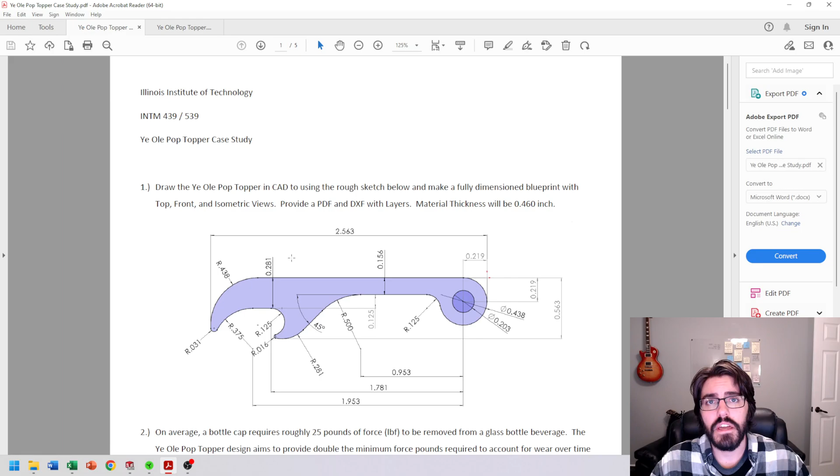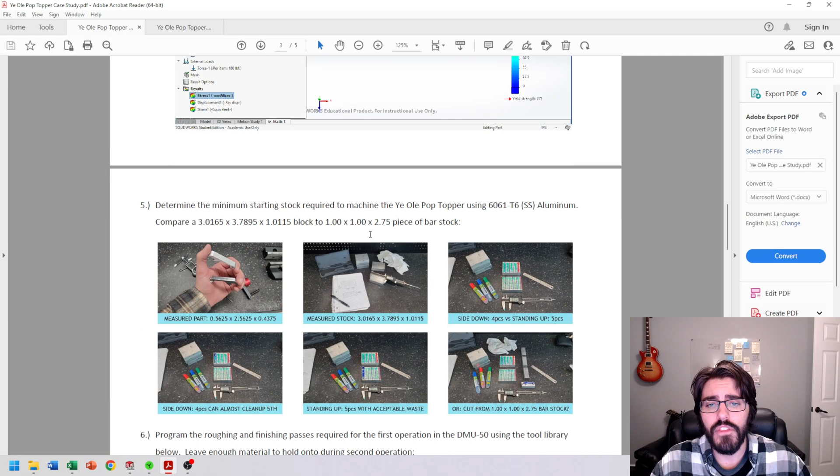And we'll create a couple configurations and apply different materials, and we'll compare and contrast those materials by using a finite element analysis, or in SolidWorks it's called SolidWorks Simulation. Then we'll make a work holding assembly for the second operation so it can be machined, and then we'll wrap up the case study by actually machining the part in class.

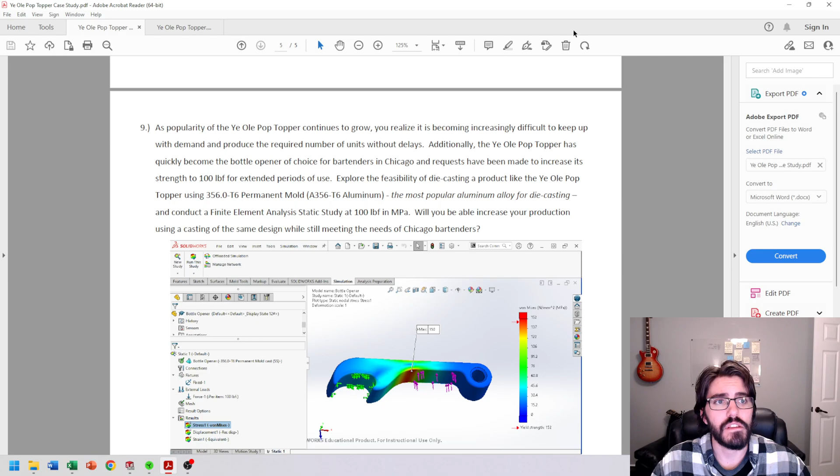So that being said, you'll be able to download a handful of files from the Google Drive and just put them in a folder somewhere. I have one on my computer already, but we'll see a file for a PDF, which is going to be the blueprint. You can open this on any device.

And then we also have a file for the DXF, which if you have SolidWorks downloaded on your computer, you should have eDrawings downloaded as well. You can also get this app on your phone, and you can send files to and from customers or clients or your boss, and they can review drawings on the go as well. But this is an eDrawings file. If you look here at the type, it's a DXF file.

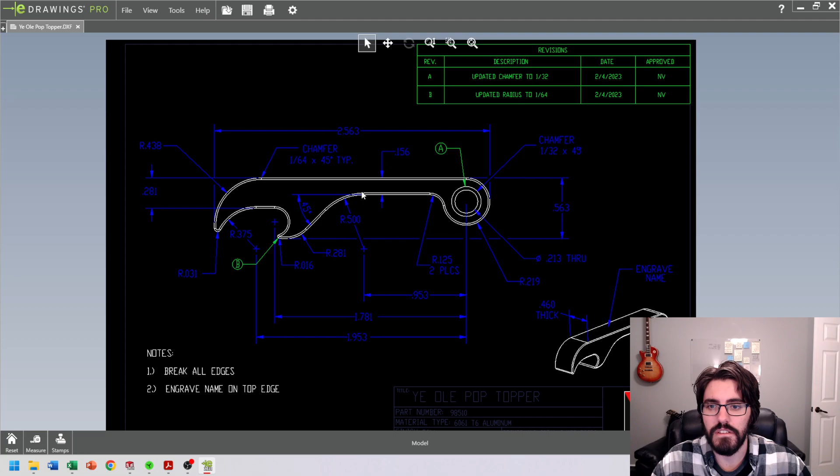If I double click on this, it's going to open up a different application. And what's convenient about this application, different from the PDF, is I can actually take some measurements of the geometry that I see in front of me. Now, I know I have this all dimensioned as a blueprint, but if I didn't have a dimension on something and I wanted to see what that was, I could click down here in the bottom left-hand corner. It says measure, and I have the little measuring tape. I can click on one edge or a point to another edge or a point, and it'll tell me what that distance is.

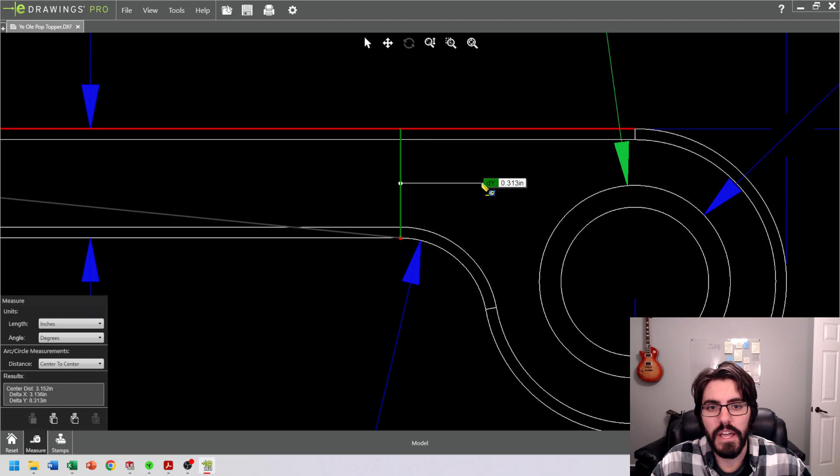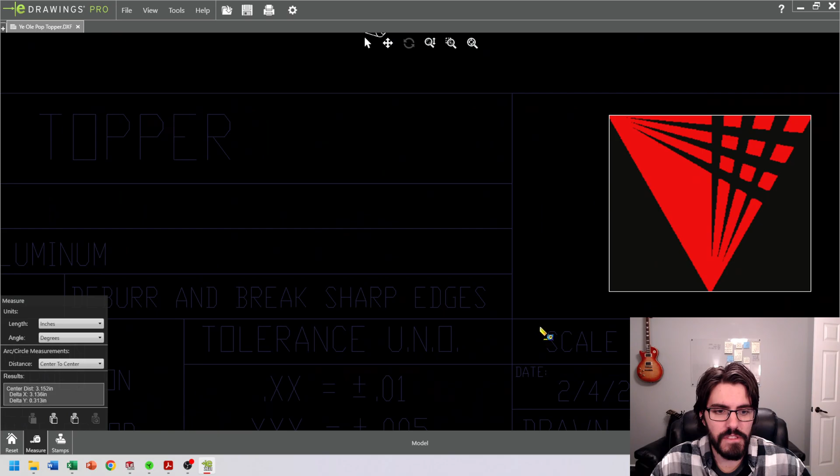Now, herein lies a little bit of a conundrum. We have a 156 dimension listed on the print, and we have 313 listed here on the measurement. Now, which one of those is correct? Well, we'll have to refer to the title block to determine that. And if we see down here in the bottom right-hand corner, we should have a 2:1 reference for the scale, which means that the geometry that we're seeing on the blueprint is twice as big as it should be. Now, that isn't a bad thing.

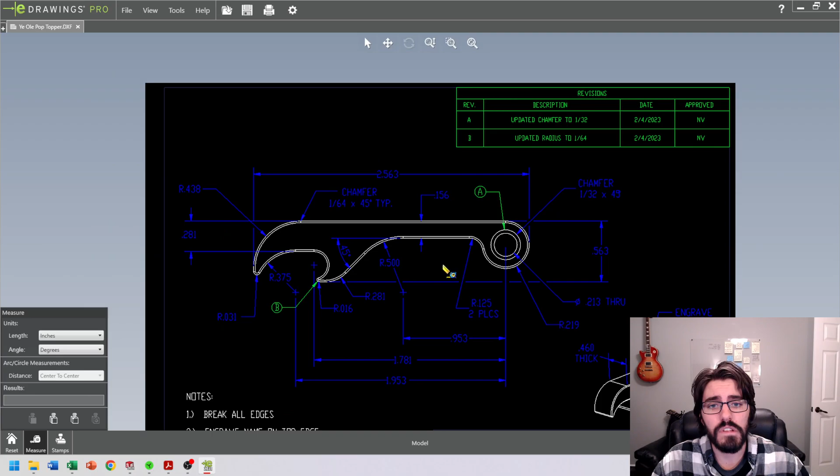It's actually probably helpful for whoever's making the drawing because the part is 2.5 inches. And if this was a 1:1 scale, we probably wouldn't be able to fit all of these different dimensions on here. So we've taken advantage of the fact that we can increase the scale and put all of the dimensions in one view instead of having to split it up between a top view or front view and then a detail view and trying to reference all these different areas of the print.

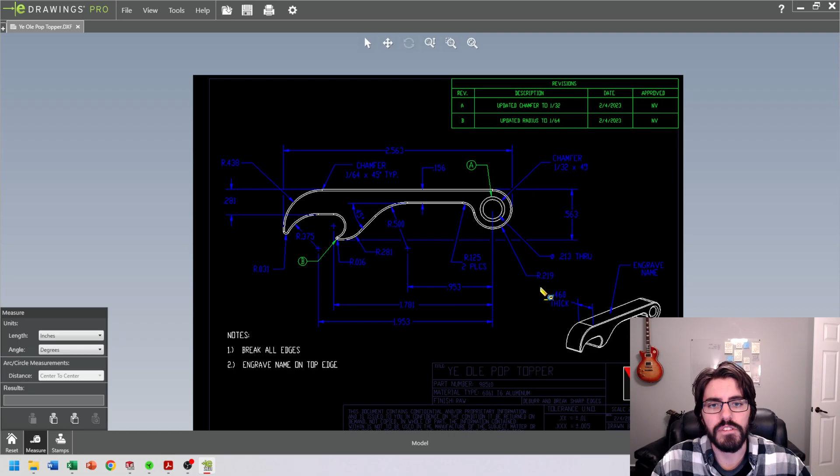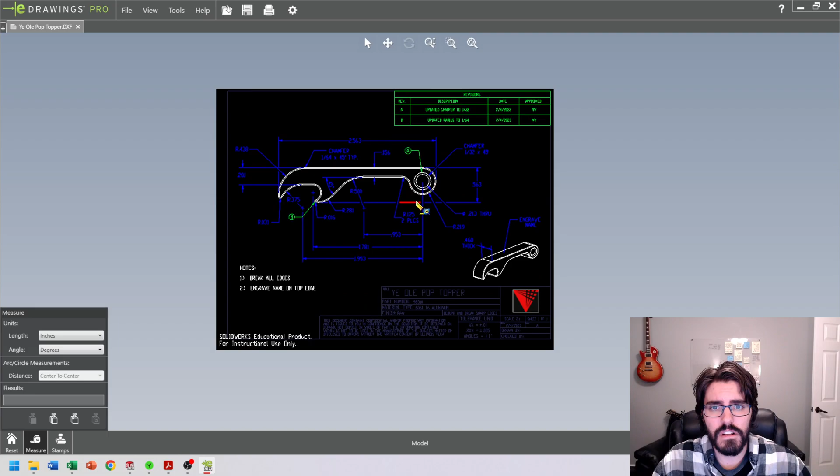So we'll cover that a little bit more in detail later, but just keep in mind that when we import this into a 3D model, we'll actually have to scale it, and likewise, we'll have to move it onto the origin and then set it up to be referenced for a 3D model. So I'm just going to close out of this eDrawings viewer, and I'm also going to close out of this little part here, and we'll start over fresh.

So there's a couple ways that we can process a DXF file or a DWG file. And the first way that we can do this is by opening it up inside SolidWorks by going up to File, Open, and then we can find the file location.

And we might have trouble finding the DXF file in the Open command because maybe we might be set to open or filter for parts, assemblies, or drawings only. So we can hit this drop-down menu on the bottom right-hand corner where it says either SLDPRTs or all SolidWorks files, but we can either change it to all files and we can find the DXF or the DWG that way, or if we hit the drop-down menu, we can filter it just by AutoCAD, Autodesk Files, DWG,

DXF. And I just want to make mention here that the difference between DWGs and DXFs is very slim. DWGs are more native and more responsive to Autodesk products like AutoCAD 2D, whereas DXF files are more universally accepted between all CAD platforms. So I tend to lean towards DXF files whenever I'm sending or receiving files. So if I just filter by this, I can find that Ye Ole Pop Topper and then I can hit open.

And I'm going to show you two different ways to do this. The first way is, in my opinion, bad practice. So maybe don't follow along step by step on your screen, and maybe just follow what I'm doing by watching. So in this instance, it's going to open up this DXF/DWG import, and it's going to ask us where to import this. And the two options are either to import it to a 2D drawing sheet file or a 3D part file.

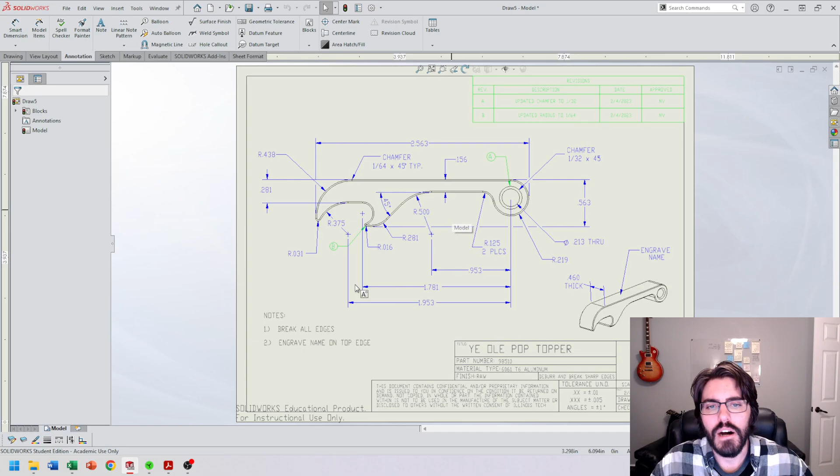But we can see here that I can click on this geometry or this text and I can delete it. But the problem here is I want to eventually make a 3D file from the DXF file. So if I was going to process this, I would have to select the geometry that I actually want to copy or cut out of this, and then go to edit, copy or cut, and then start a new file, and then paste it into the part file itself, and then I can start extruding from it.

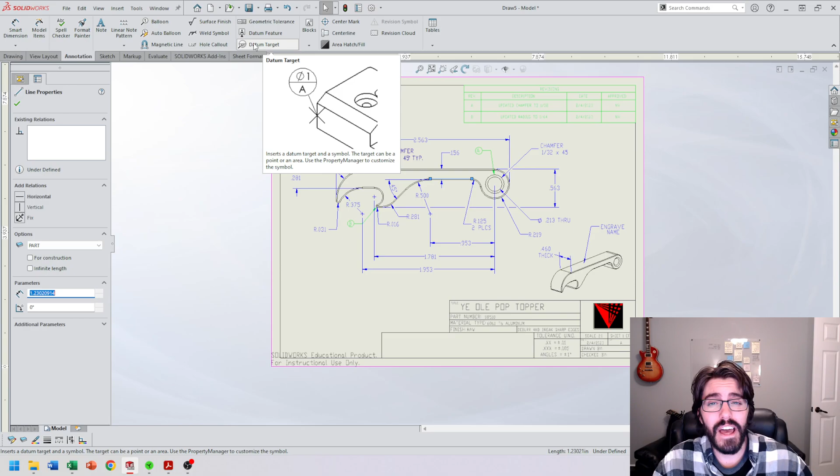I don't really subscribe to that theory of post-processing, so I'm going to actually close out of this file and I'm going to show you how I would approach this and what I think is best practice. Now, this is all personal preference and it's just dependent on how you deal with DXF files. So I'm going to encourage us all to start referencing the File Explorer rather than going to File, Open.

So if we go into that File Explorer and we find the file location, we can go ahead and with the left mouse button, click, hold, drag, and drop out here in the SolidWorks home screen. And what this will do is automatically open the DXF/DWG import. And instead of clicking that first option, we're going to click on the second option. So import to a new part as a 2D sketch.

Now what this is going to do is it's going to make a 3D part model file, which is going to be helpful because we can start extruding from the geometry that we brought in. So we can see that it says 2D sketch, and there's an option underneath it that says import as reference. The 3D curves and models are helpful if you do have 3D geometry, but in this instance it's a 2D sketch.

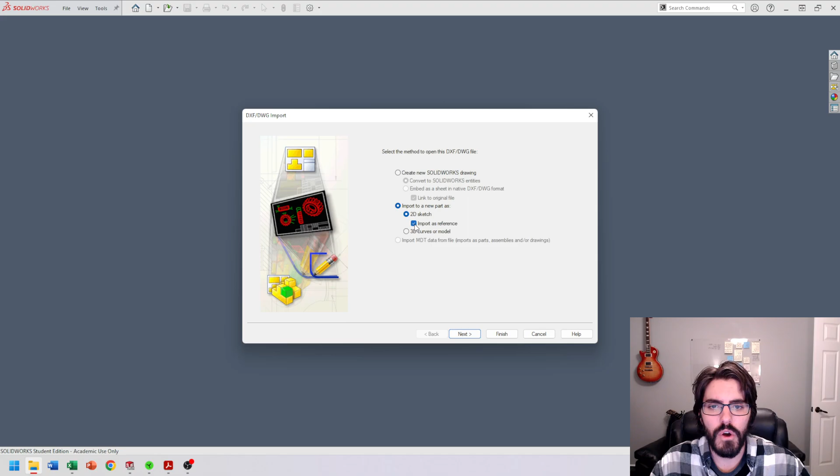I only have to worry about the 2D, and I would encourage you to just deselect this import as reference, because you'll eventually have to go into that instance in the feature tree and then make it a sketch, removing it from a reference to be used. So go ahead and deselect the import as reference and then hit next.

So then we have a very similar window here. This is a little bit more responsive in that we can actually choose different planes to actually import this onto. But for instance, the front plane and the back plane, they're really not going to be helpful. Likewise, the right plane, because it's going to compress everything to just one single line. Not going to be able to get any information out of that. So we'll just stick to the top plane here.

And then we have the option to select different layers. So if I click on selected layers from all layers, we can toggle through some of these different layers and choose what we actually want to import. And I've had lots of experience with DXF files, especially legacy files where there's like hundreds of different dimensions and notes and other callouts that are going to start slowing down your computer.

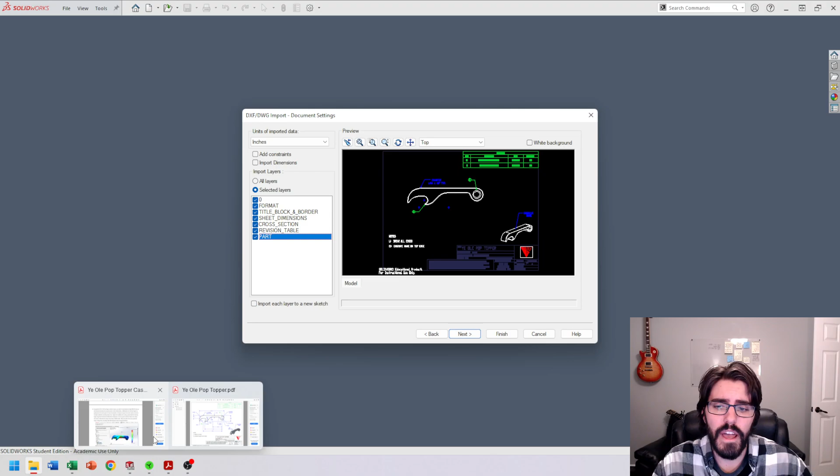So if we're just trying to process this as a strictly 3D file, let's go ahead and deselect some of the information that's not really going to be helpful, because I do have the PDF in the background here that I can always reference. And I also have that DXF that I can open up in eDrawings that I can always reference.

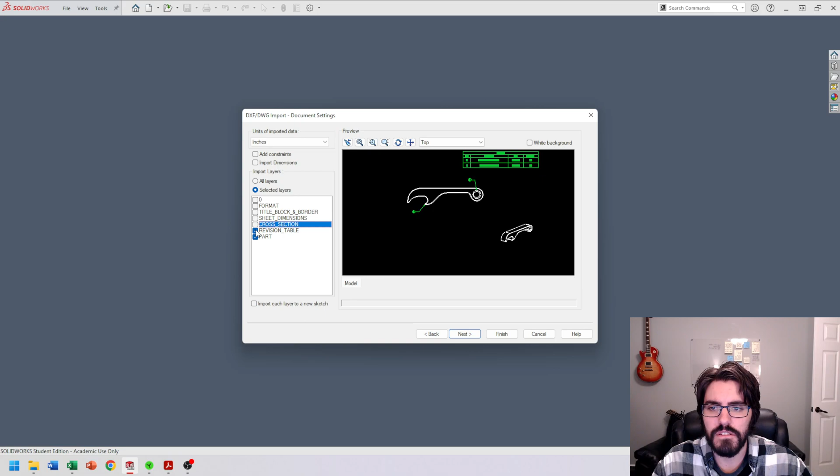So for instance, I can deselect the logo, I can deselect the format, which is the notes there, title block and border. That's just going to slow down my computer if I import that with the part file itself, and then the sheet dimensions, don't really need those, cross-section, revision table, and all I'm left with now is the part. So let's just have the part selected, hit next, and then it's going to give us an option for merge points closer than 1,000ths.

And this is helpful, especially with newer files, in that if there's a gap in between, say, a line and then a tangent arc, it'll try to merge those and make them tangent. But this could be a problem with legacy files like pre-2010, where there might be some rounding errors during the export process, in that it'll create a gap that's too big, or it'll try to force the tangency and it'll actually bulge or pop out some of the radii.

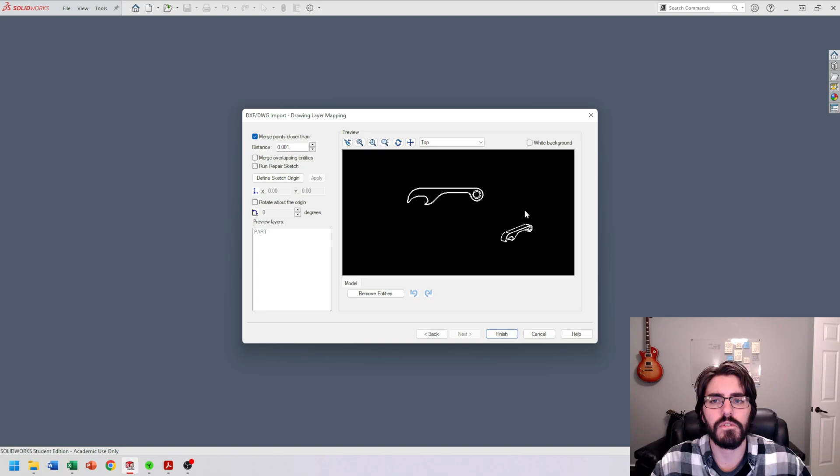So if you come across that, maybe try deselecting this merge points closer than, but I usually just leave this on, and especially I just exported this earlier today, this should be a relevant file. So I can just hit finish, and this is saying, do you want to explode the options? So we're going to hit yes. And now we should be prompted with a sketch that we're currently in, and then two views that were on the part layer of the DXF that we had.

So what we're going to eventually have to do here is we're going to have to scale this down, because as I was talking about earlier, the drawing itself is 2:1. And then we're also going to get rid of this geometry here, because if I try to extrude or reference this, it's not really going to work because it's at an isometric view.

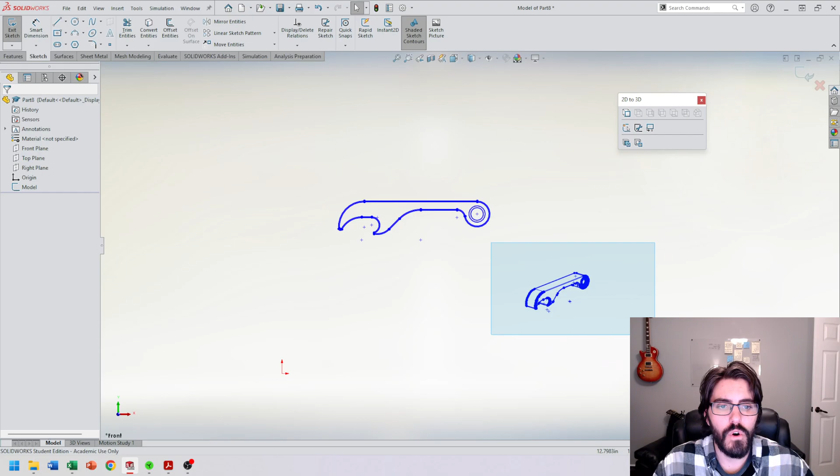So first and foremost, let's get used to selecting with the selection box or the bounding box. Using the left mouse button, we can click and just drag and hold a box over a selection. So I can just drag over this isometric view here. You see how the sketch changed colors a little bit to a lighter blue, and it's just telling me that I've selected that geometry. And then I can hit the delete key on my keyboard to get rid of it. So I'm going to go ahead and hit delete.

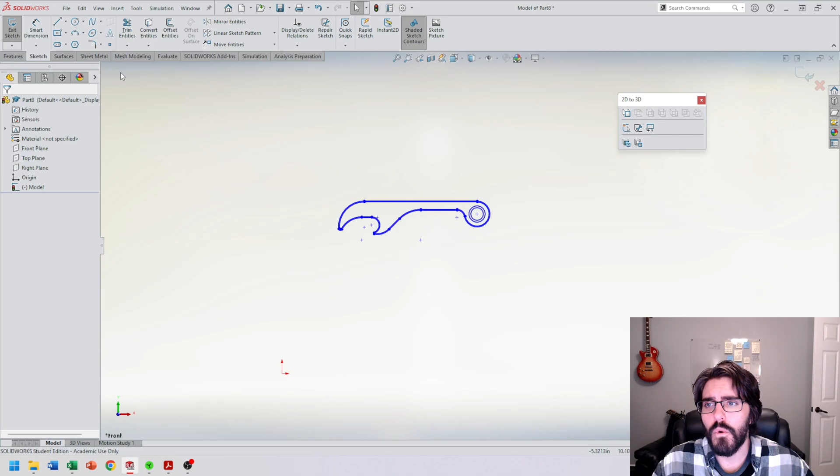So what we're going to do now is investigate the geometry that we just imported and make sure that it did import as 2:1 and not 1:1. So we're going to use the evaluate tab.

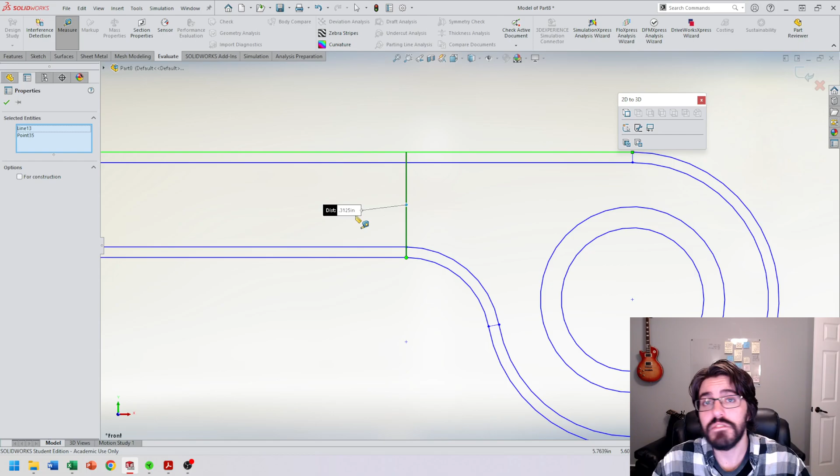So up here in the ribbon bar, we're going to hit Evaluate. And then we're going to use, just like how we had in the eDrawings, the tape measure, or this Measure option. So we can click on this and we can select, just like how we did before, a point to a line, and we can see the value of that. So that's reading as 0.3125. In reality, that should be 0.15625. So it's double the size of what I truly want this part to be. So I'll have to go ahead and scale all of this geometry down to an appropriate size.

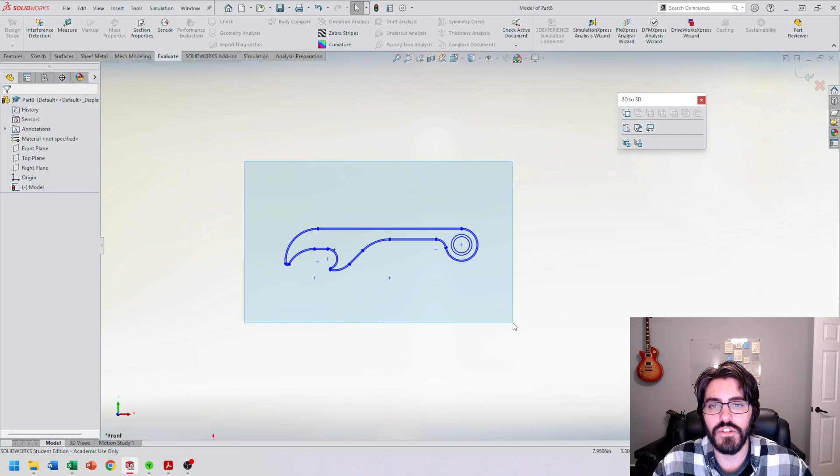So that said, let's go ahead and use the selection box or the bounding box, just like how we did before to delete the isometric view. So we'll click over here, top left, and we'll drag a box over the geometry so it's all selected. And then we're going to hop over here to the Sketch tab, and look for the Move Entities option. We're not going to click on Move Entities, we're actually going to hit the drop-down menu of it, and look for Scale Entities. So underneath Move Entities, we're going to find Scale Entities.

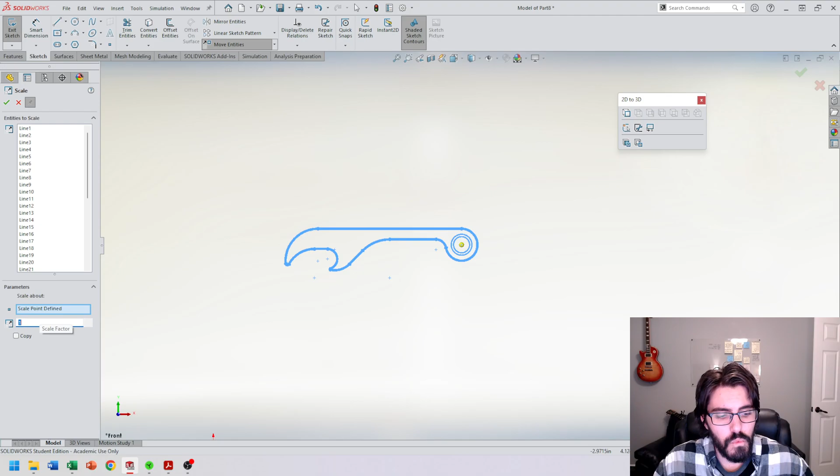And what we can do is we can scale this according to our needs. So for example, if I have a part that was drawn in millimeters and I had to scale it down to inches, I could choose a reference point. So in this blue box here, I could choose that. In the example of scaling from millimeters to inches, I could type in the value 1 divided by 25.4. And that would scale it at a rate of 0.03937, which is our scale factor from millimeters to inches. Now, we're not going that extreme. We're actually just going to go to 1 divided by 2, which is half the size.

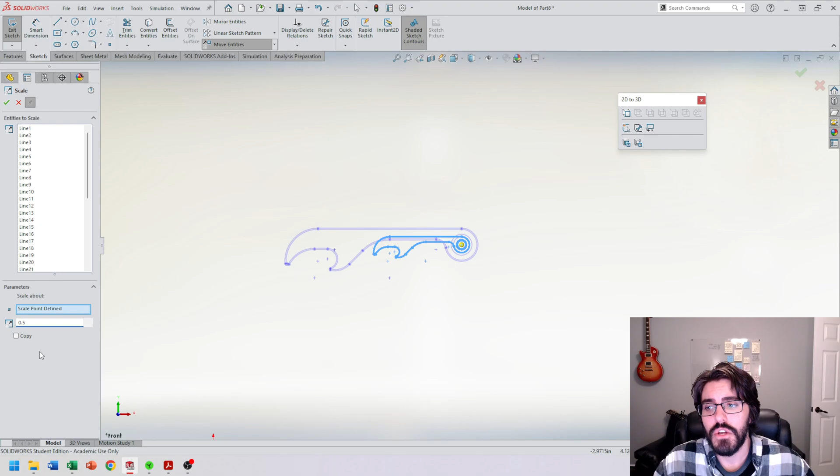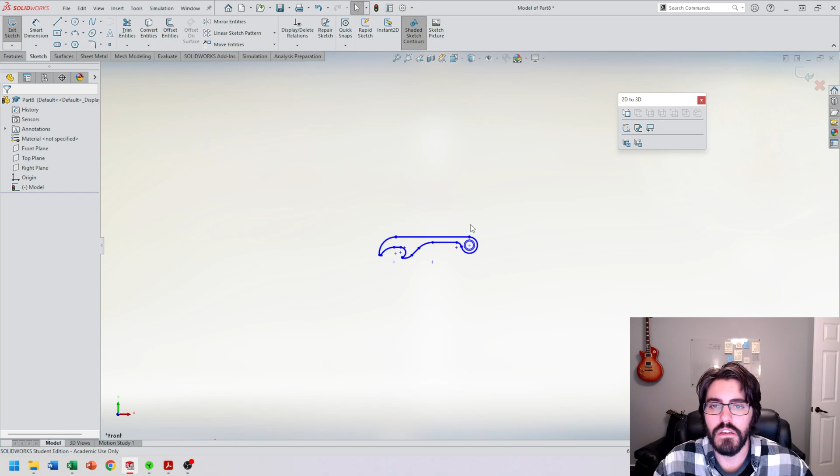So again, all I did was I selected a point to reference, so that was going to use the center point of this through hole, and it was going to scale all of the geometry that was selected by half. So then I'll hit the green check mark. And I can investigate that once again. I'll hit the green check mark to get out, or hit the Escape key. And I'll go into the Evaluate tab, and I'll use the Measure tool again. I'll zoom in, and I'll grab that point to that edge. And hey, look, it's reading 0.15625, which is the 1:1 scale that I'm looking for.

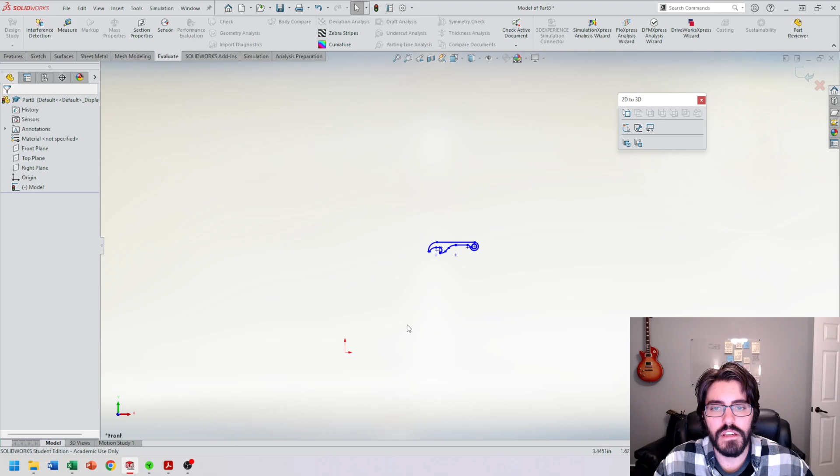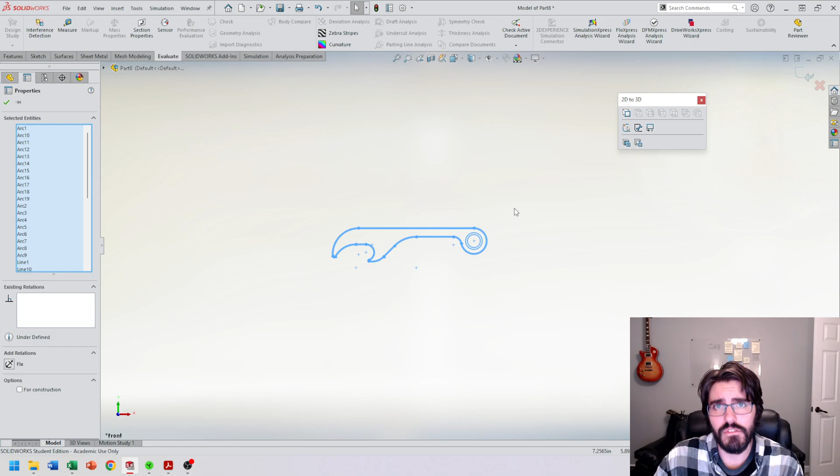So now I have a part that is scaled correctly, but it's pretty far off the origin, which isn't going to be very helpful if I wanted to eventually write G-code for this or import this into Mastercam. So what I'll have to do is, once again, select all of my geometry, and I can do a quick command of this by hitting Control-A. That'll select everything on my screen, which is helpful if I'm only dealing with the geometry, but if there's multiple pieces of geometry, it'll select everything that's in your viewport here.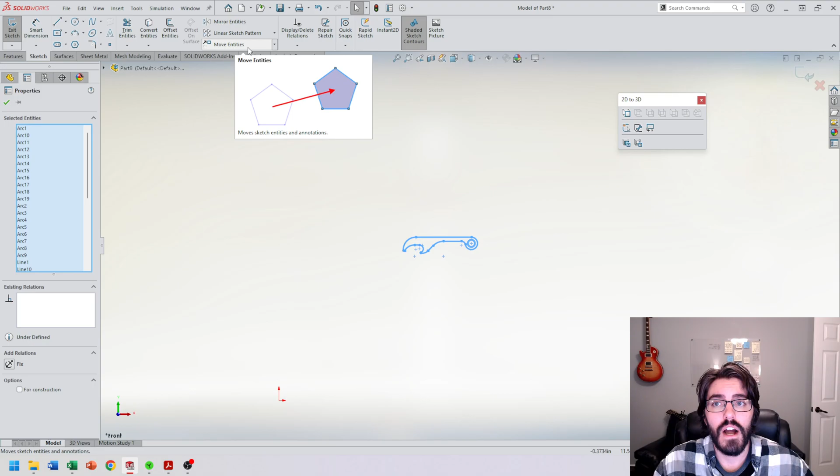So I'm going to hop back over here with all of my geometry selected to the Sketch tab, and where I found Scale Entities was under Move Entities. I can hit the drop-down menu and I can hit Move Entities. And what we're going to do here is move this point to that origin. So go ahead and choose From/To in the parameters here in the Move Entities properties bar. And I'm going to select that point.

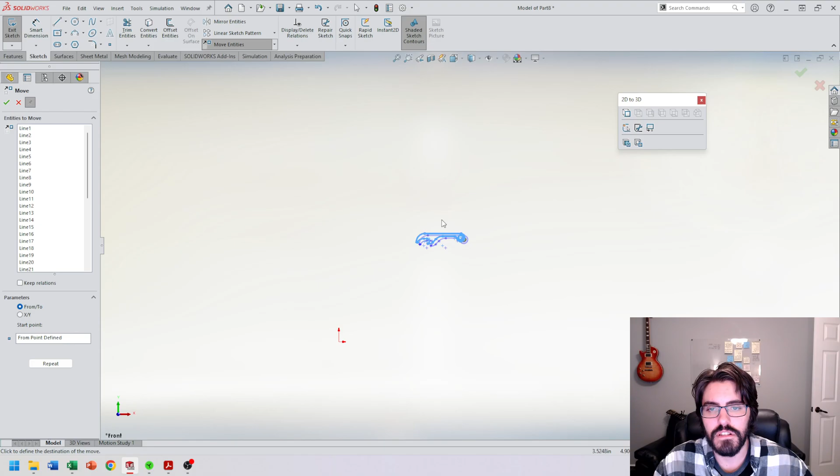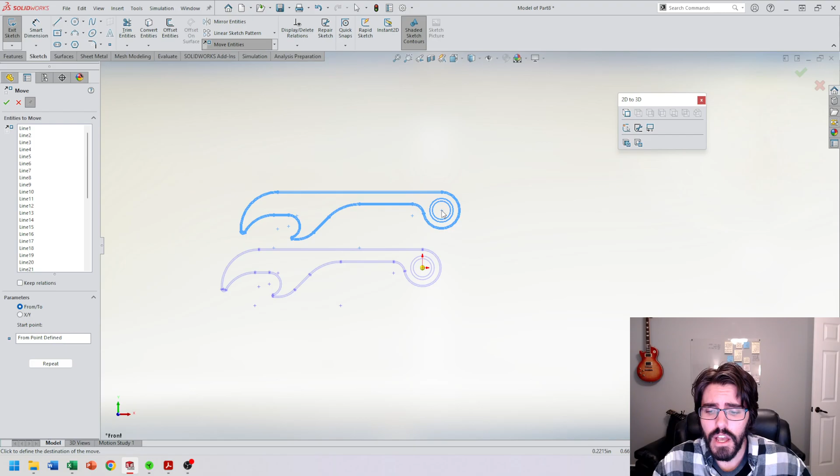And once you select that point, you'll notice that the sketch is all going to be tied to your mouse. I can drop this anywhere I want, but I'm going to zoom in here on the origin, and you'll feel the geometry snap to the origin from that center point that we were referencing. So I'm just going to click on that center point. And it's still tied to your mouse because it's wondering if you want to move it even further. I'm actually done with this command, so I can hit the Escape key. And then you'll notice that it deselected everything, but it did move my part to the origin.

So one thing that we'll have to establish now is relocating the origin of this part to the top right-hand corner, because it'll be a lot easier for us to write G-code to that instead of referencing it from this center hole and then going up that distance and then starting to go around that way.

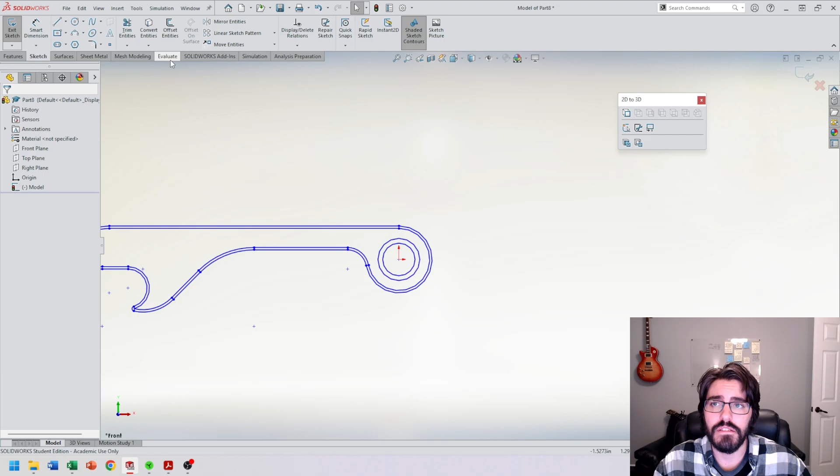So we're going to, once again, reference the Evaluate tab, and we're going to click on the Measure tool. And once we click on that Measure tool, we're going to click on that center point, and we're going to click on the top edge here, and we're going to get a value of 0.21875. And I know that this is a perfect circle here, and I'm at the center point of it, so in Y, I'm 0.21875, and in X, I'm 0.21875 from the center mark of this hole.

So I'm just going to have to shift this down so that the intersection of this line and the intersection of this quadrant are right here. And an easy way to do that is if we take that measurement, we should see a value that pops up here in that distance. So it says 0.21875. So I'm going to click on that, and it's going to select that dimension, and I'm going to use the quick command key of copy. So I'm going to hold down Control, and then click on C. So Control C, that's going to copy that dimension and put it on my clipboard.

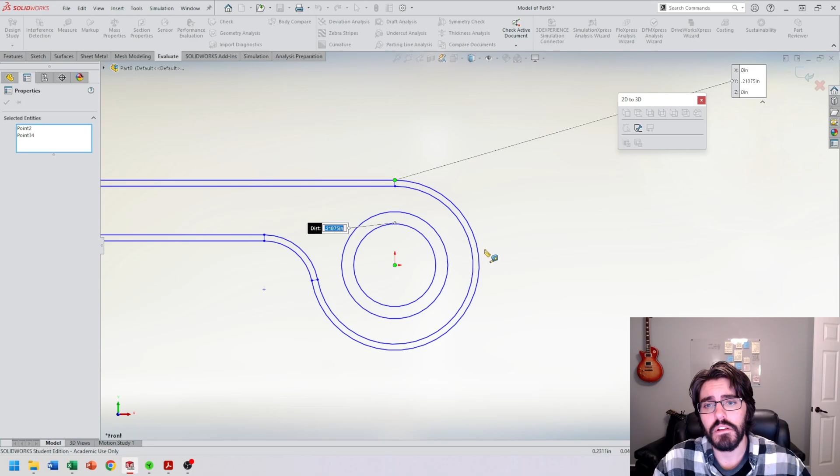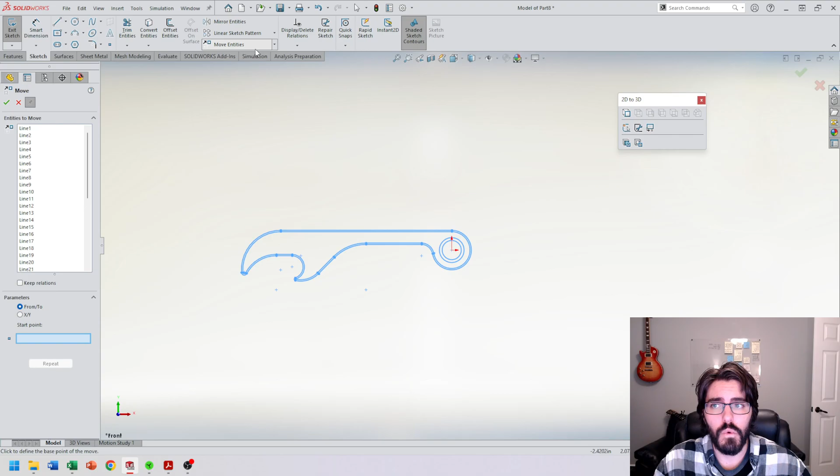So now, when I want to move this, I can also write down this dimension and keep it in the background somewhere, but if it's on my clipboard, I can go and select all this geometry once again by hitting Control A, or selecting it using the bounding box, going over to the Sketch tab, going into Move Entities once again, and instead of referencing a point, I can use X and Y. So I can actually shift in X and Y using predetermined values.

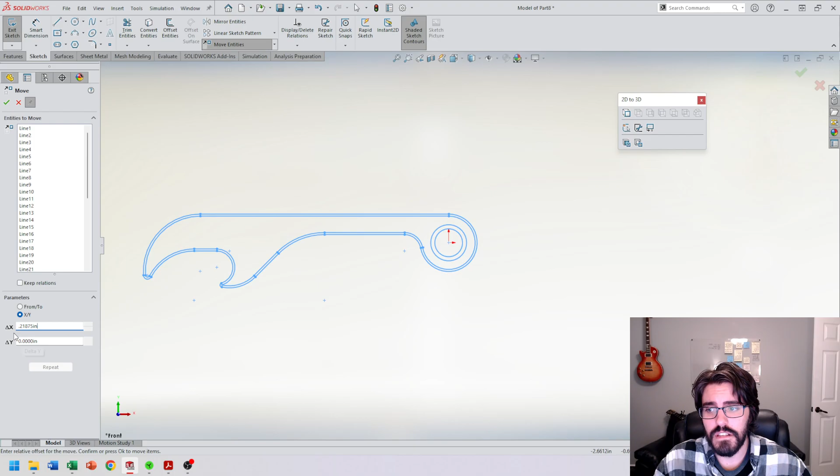So in this instance, I had 0.21875 that I measured. If I wrote that down, I can type that in X and Y to shift it down and to the left, or I can just select this 000 here, and I can hit Control V. It's actually going to paste my value there. If I click on the next instance from X to Y, you'll notice that it shifts. It shifted to the right when in reality I wanted to shift it to the left, so all I have to do is put a negative symbol in front of that. And then same thing for Y. I'll paste this, it's going to be positive, so it's going to move up. So we just have to put a negative value in front of it.

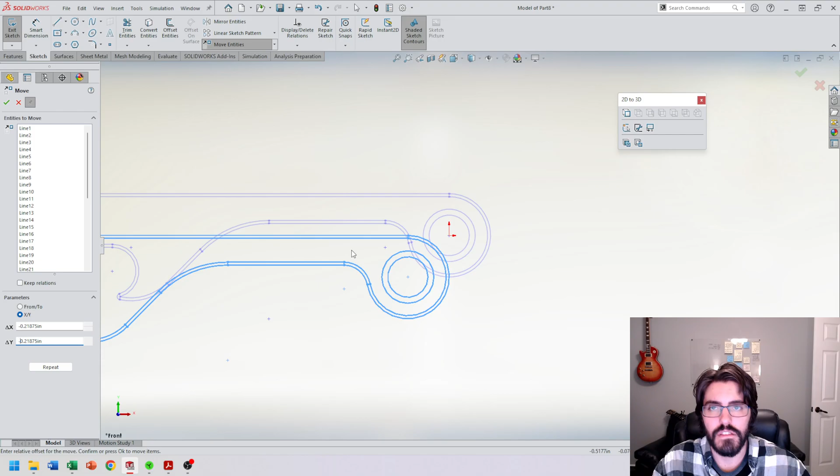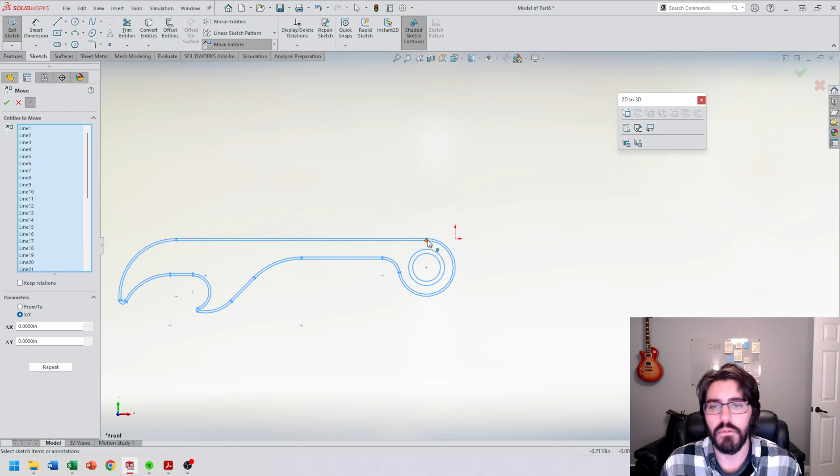And what that did is it just reestablished the origin to be at the top right-hand corner of the part. So it'll just be a lot easier for us to write G-code going around. So I can just go straight down and follow it around instead of having to offset it and then go all the way around once again. So I'll hit the green check mark. This is also very helpful when we're dealing with 5-axis because I want to rotate the part around the top edge here to engrave the name, which it says here on the blueprint, engrave name. So if I had to offset that distance, then do the rotation, it's just one extra step. I'm saving myself the step by just shifting it down.

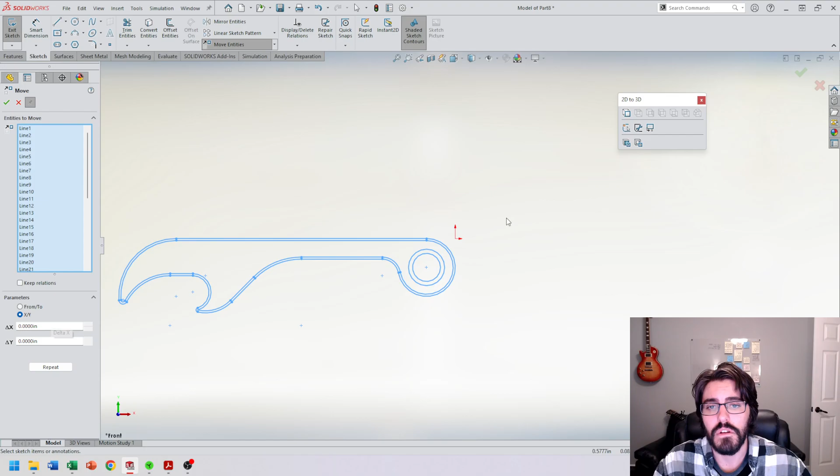So there's two ways that we can use the Move Entities command. I can do from to, like I did with the first step, where I moved it from the center point to the origin, or I can do X and Y by using predetermined values and either typing them in or pasting them in and using the positive or negative symbol to orientate it the way that I want it to. So I'm going to hit the green check mark.

I'm going to end the lesson right there, and we're going to pick up in the next video and actually start creating 3D geometry from this DXF that we just positioned from the import.